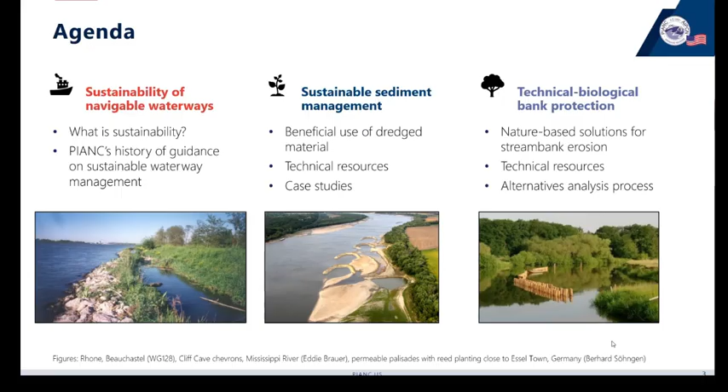And then finally, he is going to be showcasing the process that they developed for identifying alternatives and how to select which alternative is most appropriate for helping reduce bank erosion for those particular projects in inland navigation. Okay, then moving on to our first topic.

Well, I know all of us certainly have a pretty good understanding of what this concept of sustainability is, and we've seen many definitions of it. But I really would like to get us kicked off on that to make sure we understand where we're coming from from a PIANC perspective. Sustainability is simply achieved by efficiently investing resources to create both present and future value. And I would argue, adding to that, thinking about how that can be contributed by nature-based solutions, for people and the environment.

If we think about sustainability, it's built on 3 primary pillars that you see there in the graphic below. Certainly environmental makes sense, but also looking for social and economic benefits and value associated with our waterborne transport infrastructure projects. And so we seek ways to incorporate those types of benefits beyond the underlying engineering benefits associated with the project. Okay, next slide.

So we think about sustainability and the contributions of beneficial use of dredged material to help us manage our sediments in a more sustainable manner. And there are a number of ways in which we can do that. Obviously, simply removing the material from the Federal Navigation Channel has substantial benefits associated with that.

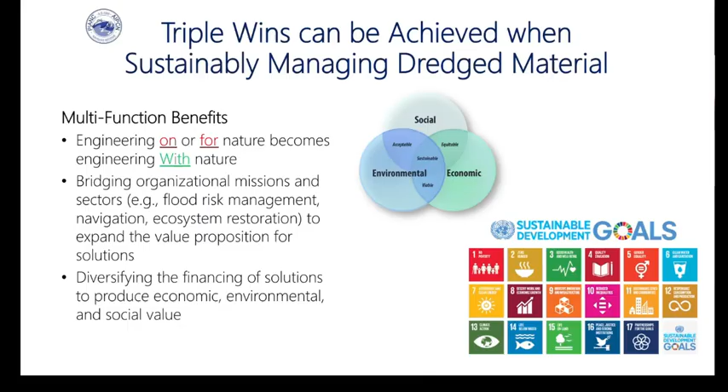And we're going to be highlighting two of those reports more than the others as we go on through our presentation here this afternoon. Okay, next slide. Okay, then moving on to sustainable sediment management.

One of the key precursors, I think, to increasing sediment beneficial use, particularly in the U.S. and particularly within the Army Corps of Engineers, is the release of that command philosophy notice in 2023 by our commanding general at the time, General Spellmon, saying, hey, we need to try to achieve 70% beneficial use by the year 2030. So that command philosophy notice was codified in our Water Resources Development Act in 2024 that you see there on the lower right in section 1130.

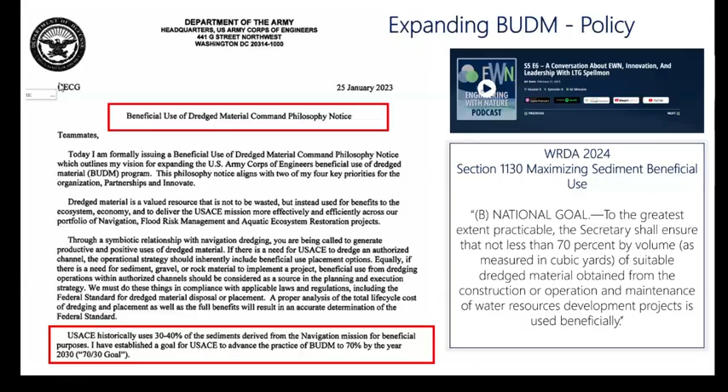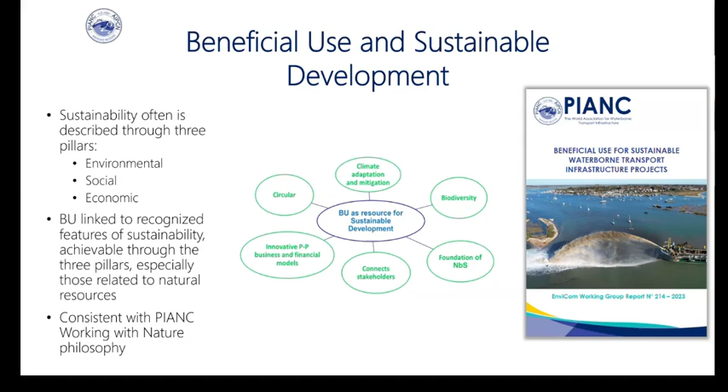That is certainly true in the U.S., but also in other countries around the world, certainly those PIANC members that are part of the Environmental Commission. We look at sediment beneficial use here as being linked to a number of features associated with sustainability, including, for example, circular economy, our attempts to adapt and mitigate to a changing environment, potentially increasing biodiversity, and also certainly a foundation of nature-based solutions. Okay, Will, next slide.

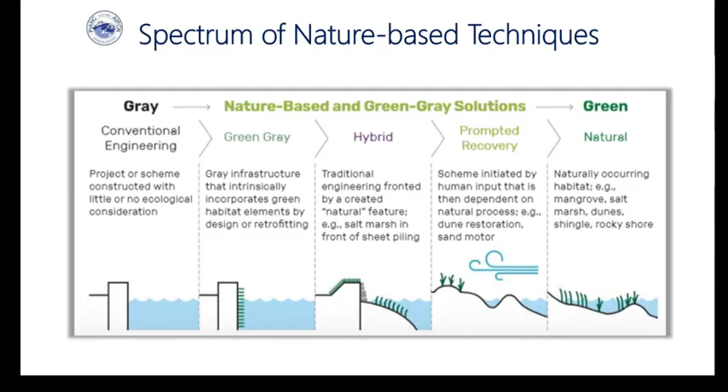Speaking of nature-based solutions, I really like this graphic a lot because it does, I think, a pretty good job of helping us describe what nature-based solutions look like as a spectrum across a wide range of project types that we have, historic but also current. Going from the gray conventional engineering on the left-hand side, essentially, your project or your scheme has little or no ecological consideration. There is no intent there to create value beyond the underlying engineering objectives of the project.

But as we work our way to the right here, we go to greening the gray, those features that are incorporated into conventional projects that create value beyond what was originally considered. And then we move on to hybrid, prompted recovery, and then natural infrastructure, the mangrove forests, the sand dunes, the rocky shores, and so on. So because there is so much existing infrastructure around the world, a lot of the opportunities are going to be during repair, modification, or redesign of existing infrastructure. So a lot of the opportunities are going to be greening the gray and hybrid solutions. Okay, next slide.

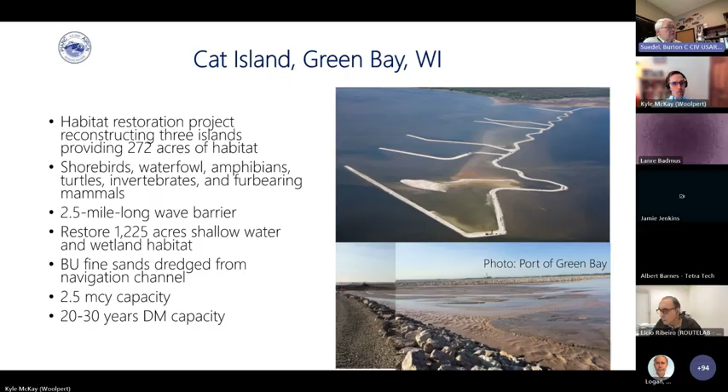So when you lose that natural infrastructure in the form of islands, you also lose that ability to reduce those forcings on the port. And so a big advantage to restoring the islands, as you see here, is you can restore those benefits, the environmental, the ecological, and also the social. The advantage we have too, certainly in our Detroit district, who was a big part of this process, is they ended up gaining 20 or 30 years of dredged material capacity, over 2 million cubic yards, in restoring this Cat Island chain. So an excellent triple win bottom line outcome here in the Great Lakes. Okay, next slide.

Another example on the Great Lakes: this was a situation where we had a confined disposal facility that I believe was at capacity, but it was essentially overtaken by non-native species. And so the idea is, let's try to reclaim that, beneficially use that, and restore it in ways that can create much more additional value than would otherwise have been considered.

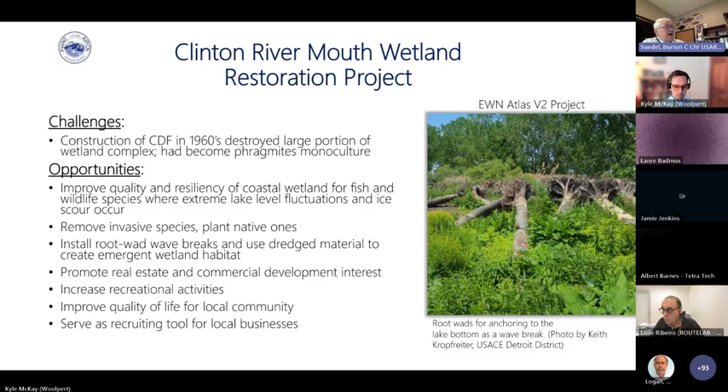So in addition to transitioning the land side of the CDF, we also used beneficial use of dredged material. You can see the natural infrastructure there in terms of the root wads to help stabilize the bank line. What was important here also is this particular project was very, very close to the local community. And so you've got recreational, real estate, and improved quality of life associated with this restoration project as well. So a lot of multiple benefits coming out of the restoration and transformation of this confined disposal facility. Okay, next slide.

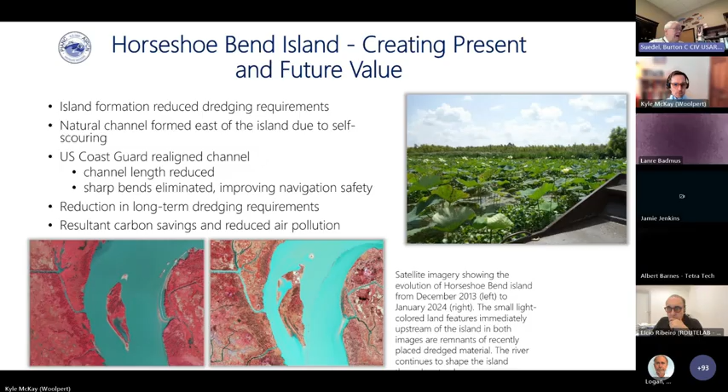New Orleans district is now only dredging about once every 4 to 5 years. So a great reduction in dredging requirements. We're going from a very unsustainable situation to something that's very, very sustainable. And you can see, as they continue slowly over time to add material in that part of the river, the island has continued to grow with additional placements. Okay, next slide.

Biloxi, Mississippi is another good example. This is just 100 or so miles south of where I sit in the state of Mississippi. But I tell you what, these barrier islands play an important role wherever they are, not only in the U.S. but also around the world, because they help blunt those forcings, particularly from Hurricane Katrina and other named storms. If they weren't there, the billions of dollars of damage would have gone up exponentially. But they've been hit hard by these natural forcings.

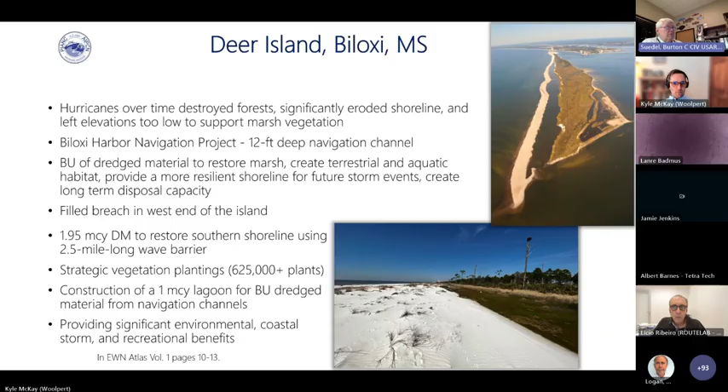And so the Mobile district said, when we have these navigation projects, let's use that material beneficially in ways that help restore the island and all the value associated with it: the economic, the social, certainly the recreational, the environmental, and also that island's ability to blunt forcings from future storms and their potential impacts on coastal Mississippi. So a great project. You can see a close-up example in the bottom photograph. On top of that, we have also created some future placement opportunities, so additional beneficial use associated with the island is there for us in the future. Okay, next slide.

Fort Pierce Island is a great example. Nature does not draw straight lines. So if you ask yourself, am I going to design and build a breakwater that's a straight line? Well, I personally would encourage you not to, but look what they did at Fort Pierce Island. Again, another example of a marina that was severely damaged during a hurricane in 2004. So if we're going to create a breakwater here, how would nature build it? This is a really good example of how nature would go about doing that. So 150,000 cubic yards of dredged material.

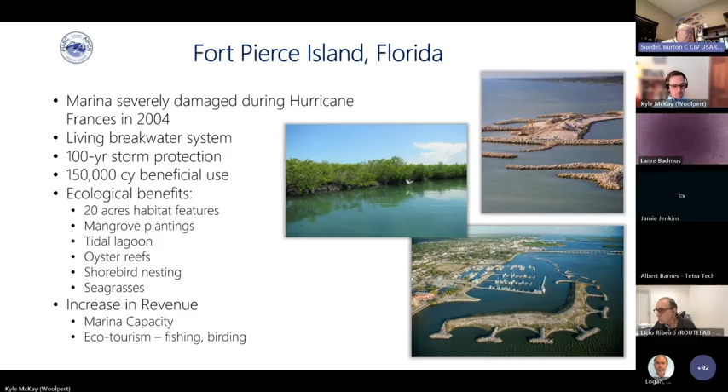Yes, we can use large rock, but look how they used large rock here to create not only the underlying engineering benefit, but also other benefits as well, particularly environmental. You can see the ecological benefits printed there. The marina was able to enlarge, but the communities behind the breakwater also receive benefits, because future forcings are going to be reduced by these breakwaters. So you get community risk reduction benefits as well. Okay, next slide.

Moving on to the west coast of the United States, in our Portland district of the Corps. The idea here: we have a federal navigation channel along the lower Columbia River. And so they're looking for ways in which to beneficially use that material to help create habitat value, because we've lost a lot of those wetland and other habitats.

And so let's look for ways to create not only land-based habitat, but also habitat nooks and crannies, if you will, that help create shelter for salmonids that, from the juvenile stage, are certainly lacking those protective shelters. And so this type of project gives you an example of how we can achieve multiple benefits as well. Okay, next slide.

Our Huntington district has done an outstanding job in the last 25 years of not only keeping the sediment in the system, but looking for ways to reduce their dredging costs, reduce their dredging need, but create multiple benefits as well. So they knew enough about the local hydrodynamics. They knew based on historical navigation charts where a historical bar was located. So the idea is to try to restore that historical bar with placements of dredged material. And you can see where they're placing the material in the two top photographs.

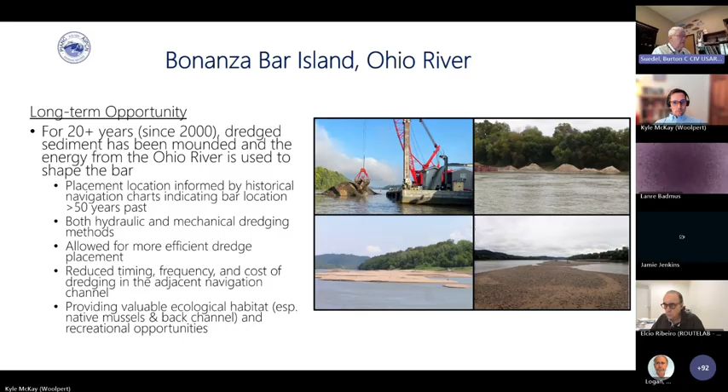What's also important for us is there are native mussel populations just downstream of that. And so we want to make sure that any of that material being relocated by the river does not adversely impact those mussel beds, which makes perfect sense. But what is happening is the relocation of that material is actually creating a more diverse and larger footprint of sand and gravel substrate, such that some of those native mussel populations are actually increasing as a result of these beneficial use placements. Okay, next slide.

Another example: as part of the Engineer Research and Development Center, we are actively doing research along these lines. This slide is just an example of some of the research going on you may not be aware of, but I think is very relevant, thinking about ways we can increase sediment beneficial use, particularly the fine-grained materials, looking for ways they can become components of cementitious materials and create natural infrastructure or hybrid infrastructure, as you see here.

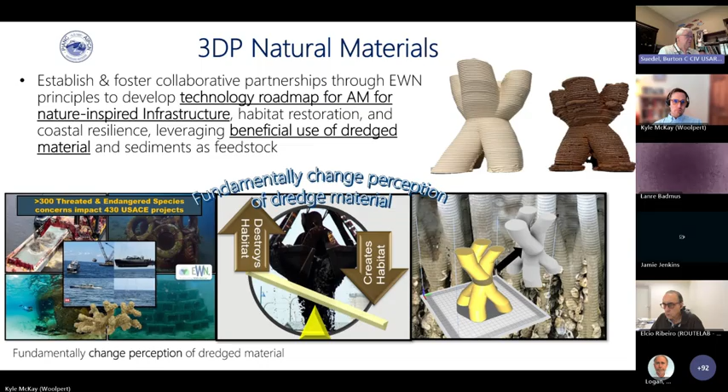The beneficial use of dredged material to create these habitat structures helps, when they're placed in the environment, to reduce those forcings and create habitat value of the infrastructure. So it's just an example of the ongoing research relevant to sediment beneficial use. Okay, next slide.

It's really very important, and I'm really excited that Jacob Berkowitz within the Army Corps of Engineers, a colleague of mine just down the hall, and co-workers asked the question a few years ago: we have been beneficially using material within the Corps in the last 40, 50 years. What about those historical projects that were built in the 1970s? How are they doing now? So it's a great question.

And they identified 6 locations within the United States and evaluated their condition after 40-plus years of being on the ground. All 6 of these are totally unconfined. There's no large rock, no concrete, no steel, nothing associated with them. So how are they doing 40-plus years later? Turns out they're doing quite well, as a matter of fact. But a couple points to make: they're being shaped by natural processes.

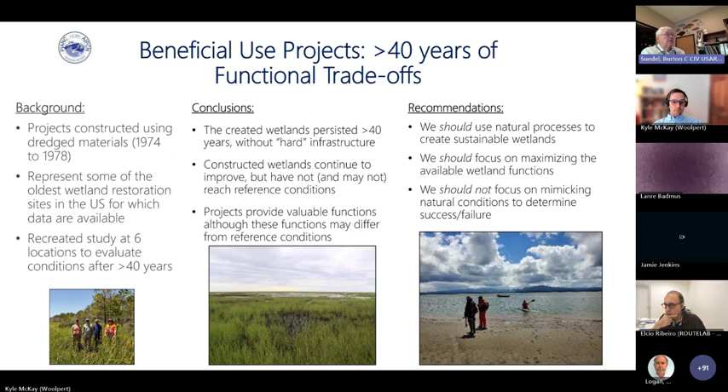They're creating great value, but realize if we compare them to natural wetlands, they may not be very comparable, but they're providing multiple value functions. So the bottom line here is we should focus less on mimicking natural conditions in terms of determining success or failure, and think about all the benefits, value and functions they're contributing in their current state. So great project and great research. Okay, next slide.

So I hope I gave everyone a sense that there may be many opportunities to apply sustainable sediment management practices. These are just some of the examples that we and others have worked on in the recent past and currently. So I think it's important for us that if you take the sediment out of the system, you're going to starve that system. So we want to try to keep that sediment in the system as much as possible.

We need to focus our energy working collaboratively. And those collaborations, I think, are going to help accelerate the progress in terms of developing nature-based solutions, particularly as they include sediment. What's very, very important to us, too, is communication. Not only do we have to collaborate, we have to communicate effectively what's worked, what hasn't worked, so we can then rely on those lessons learned and continue to build on that research and that knowledge going forward to have even more effective, sustainable management of dredge material.

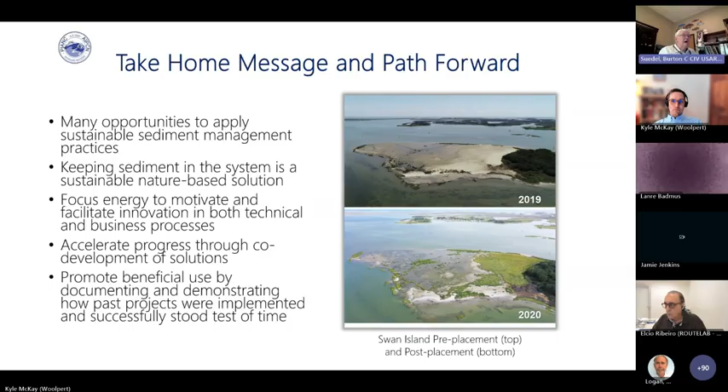Great. Thank you, Burton. That's great context for pivoting to a slightly different subject. So Burton spoke about all of the different operational benefits associated with sediment management. And in this half of the presentation, I'm going to take us a little different place, to thinking about design of a particular kind of feature. And we'll talk about multifunctional design and how to think through that process.

Before I get started, though, Burton mentioned this notion of nature-based solutions and how it's a large spectrum of actions from kind of conventional to natural systems. And you might say, well, are all of these engineering actions? And I think there's kind of a logical development of the spectrum from its history in two different disciplines.

So on the engineering side, we have kind of a historical version of engineering from prior to the 1970s in this country, which was focused on domination or control of nature. And here we see the more hard engineering paradigm of concrete and steel and straight lines. But over time, that notion has eroded, and now we see a lot more emphasis on expanded project purposes and resilience of designs, both in terms of natural systems, but also built systems.

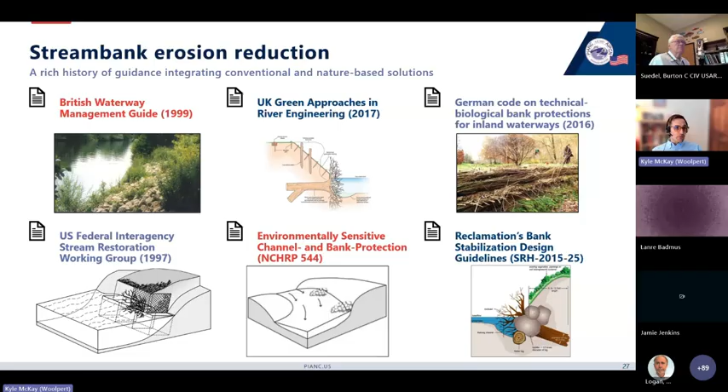And what I want to point out here is that as we've learned more, our guidance has evolved alongside of these fields of practice. And here's a few select examples of guidance over the years, ranging from British waterway guidance in the late 90s, emphasizing planted riprap and the role of stone and plants together, through German guidelines, US guidelines, all showing an increasingly diverse set of materials in play and arranging them in different ways, whether it's willow mattresses or root wads or actions in the river, like, say, bendway weirs or other features.

But if we take a step back and think for a moment, what can we learn from all of this existing guidance? And I would say there are a few key things. One is that when we talk about any one dimension of a river, like, say, stream bank erosion, we can't isolate it from the rest of the system.

That even guidance documents on riverbank erosion often emphasize the role of in-river management, this notion of a system of projects working together that Burton was emphasizing. Secondly, we can look to this guidance and say, oh, there are a lot of different materials at play.

We have concrete, steel, rocks, and we've got soil stabilizers and geotextiles, and we've got vegetation, and we've got in-water vegetation and large wood. And what we're doing is mixing those in different ways, and that's what's creating our spectrum of green to gray techniques or conventional to natural. And in the middle, though, is the majority of what we're doing. It's this blend. It's a hybrid of approaches for managing riverbank erosion.

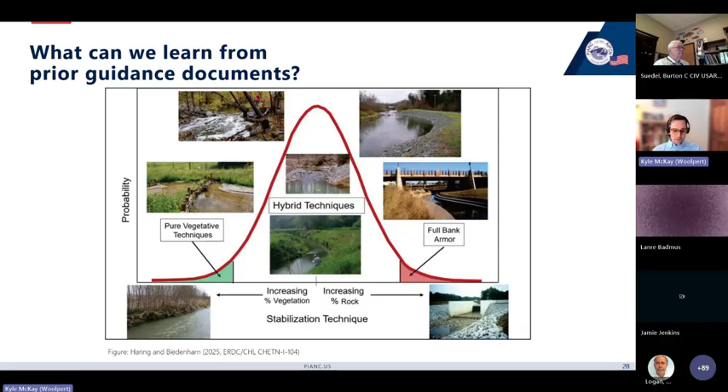I think of it like when you go to bake in your house. If you're making cookies, cake, or croissants, you're using some combination of flour, sugar, butter, milk, and eggs. But the ratios you use change depending on what you want the outcome to be. And it's kind of the same thing in the riverbank erosion literature, but not with cookies as the outcome.

So into this fray comes PIANC, and in this case, I'm going to tell you a little bit about some work that was produced under InCom Working Group 128. And this group was led by Dr. Bernhard Söhngen out of our German chapters of PIANC. And after years of working on this topic of technical biological bank protection, ultimately the working group produced 3 big volumes of guidance on design and implementation of these features.

And I can't tell you about everything today, but this 3-volume set talks about the library of methods that are out there and recommended. It talks about how to categorize them and think about the differences among them. It provides case studies globally. And then it says, here's kind of the cookbook for thinking through the design process. And that's what I'm briefly going to give you a sneak peek on today.

So step 1 of that process, and this will mirror a lot of what Burton was suggesting, starts with figuring out what the outcomes are and the performance goals. And it's important to understand that those are sometimes different, that maybe stakeholders are more interested in the outcomes of, say, a functional ecosystem or reduced bank erosion, whereas the engineering design may need to emphasize the performance goals, things like what is my risk tolerance, what's my design storm, what are the changes in boundary conditions that my site might feature in the future.

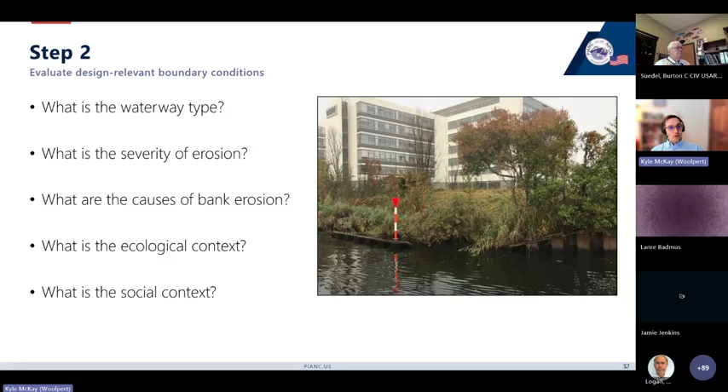And as we think about different waterways, we may have a free-flowing waterway versus a pooled system. In an ecological context, we may have a temperate zone versus a tropical river. And in a social context, we may be in a highly confined urban area or a wide open river corridor. So we're articulating what those boundary conditions are as we work towards what designs are going to fit in that system.

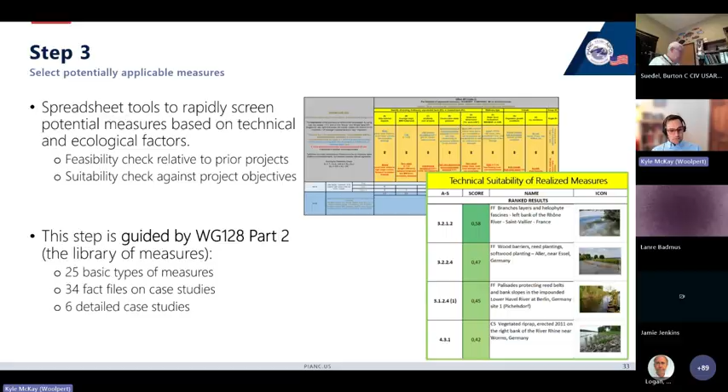In step 3 of this process, we're diving in on what measures we might find useful at this site. And the working group produced a set of spreadsheet tools to help screen measures. In particular, the worksheets and toolkit help look through over 25 different types of measures in wide use globally, as well as 34 case studies and 6 detailed case studies. And the toolkit helps think through, is this feasible for my site, and is it suitable for the project objectives I had? So we're screening down those measures and figuring out which ones are most appropriate.

Now that we've got a subset of measures that we're looking at, we can start to compile data on those and think about how they perform in the landscape. And the easiest way to do that is to think about how they've performed elsewhere. So in this step, the working group recommends going to those case studies that we have details on and looking at what the boundary conditions were and the physical performance and ecological performance at other sites, and thinking about how that would or wouldn't translate to your particular site.

I think of this step as the step that a real estate appraiser might undergo when estimating the price of your house. They would look around to other houses in the neighborhood and they would say, how much do those houses cost and how are they similar to the one that I'm estimating the price for? And that's roughly what's going on here, looking at other sites and how that performance might translate to your particular focal site.

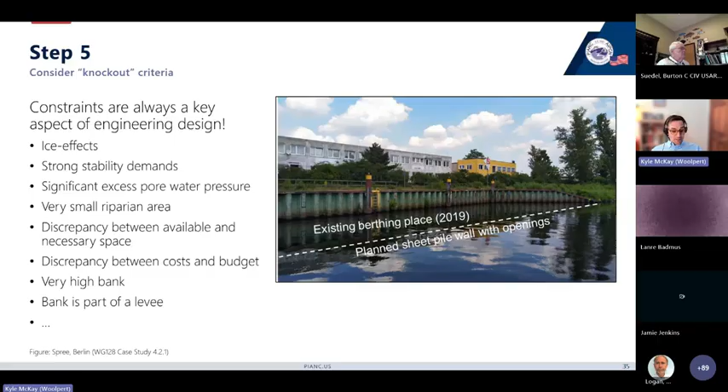The fifth step will resonate with every engineer, which is going through those different knockout criteria or figuring out what constraints exist at a site. Often design is as much about minimizing constraints as it is maximizing objectives. So there are, of course, a litany of constraints that may make your site harder to design at or less of a translation between those examples. So this step is really emphasizing, are there reasons not to use a specific measure?

But now we've gone through those sort of clear-cut different types of bank protection. But this is where the design process gets creative. We can start blending those, and we can start to cook a little bit beyond the recipe, so to speak. Instead of just thinking of it as, say, a willow mattress or a longitudinal dam, maybe we can have a blended design at our particular site. And this is where we start to see those hybrid features emerge and why hybrid features are increasingly common.

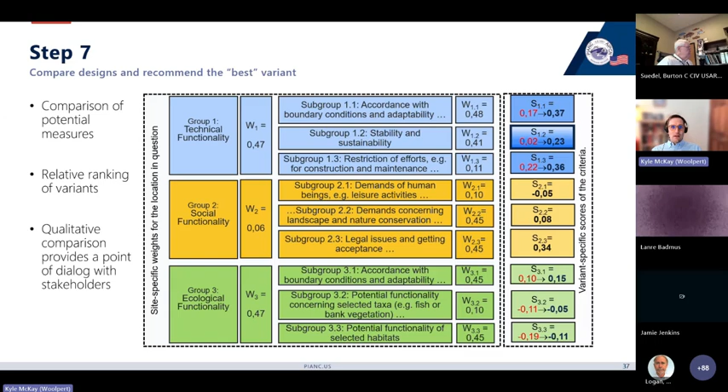And then finally, once we have our design alternatives, we can go back to comparing those designs relative to our objectives. So in this step, the working group, again, provides a set of tools to help users think through the utility of a given design relative to technical outcomes, social outcomes, as well as ecological outcomes. And these tools, in addition to being useful for the engineering or the design team, also provide a starting point for that dialogue that Burton mentioned with stakeholders about how are we thinking about the site versus how other people are thinking about the site.

So what are some take-homes from Working Group 128 that might translate more broadly about nature-based solutions or about sustainable river management? One for me would be that this dichotomy between the ecosystems over there and infrastructure over here, that erodes every day. We're increasingly seeing working landscapes where we have social outcomes and we have environmental outcomes, and our projects affect all of those. And so this notion of restoration over here and infrastructure over there, it's not really needed anymore. We need to be thinking of both and. How do we include all of those outcomes together?

Second, occasionally people will suggest that there is no guidance for nature-based solutions. We couldn't possibly use those methods. I would say that's, generally speaking, quite false. River engineering has a deep, deep history of aligning natural processes with engineering design. And there's often a rich history of guidance in these subjects. However, as fields mature and as our body of knowledge grows, so too does our design approach. So there's always a need for new or emergent design methods, and programs like the Engineering with Nature program are investing in that appropriately.

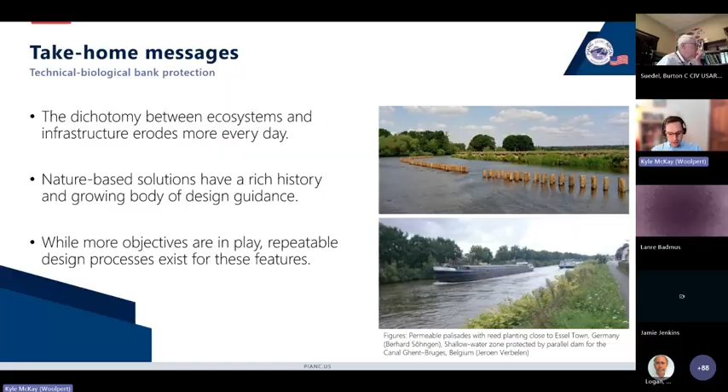So from our presentation today, I hope you heard a few themes. So Burton talked about more operational issues with sediment, and I talked about more design issues with bank protection. And both of these are examples of sustainable practices representative of kind of broader trends in our field. And so our point with this presentation is just to get you thinking along these lines, not to say that these are the only two sustainable practices in rivers, but instead they're representative examples of how the community is evolving through time.

And overall, for me, this notion of sustainable waterway management focuses on doing more with our designs and making our designs more and more multifunctional and better performing through time. And as we think about that, we're adding new objectives like ecological outcomes and social outcomes, but the fundamentals of engineering design remain the same. I'll close by saying that PIANC has long played an important role in this community of practice, and I think it will continue to as our management of our rivers and inland waterways becomes more and more sustainable through time.